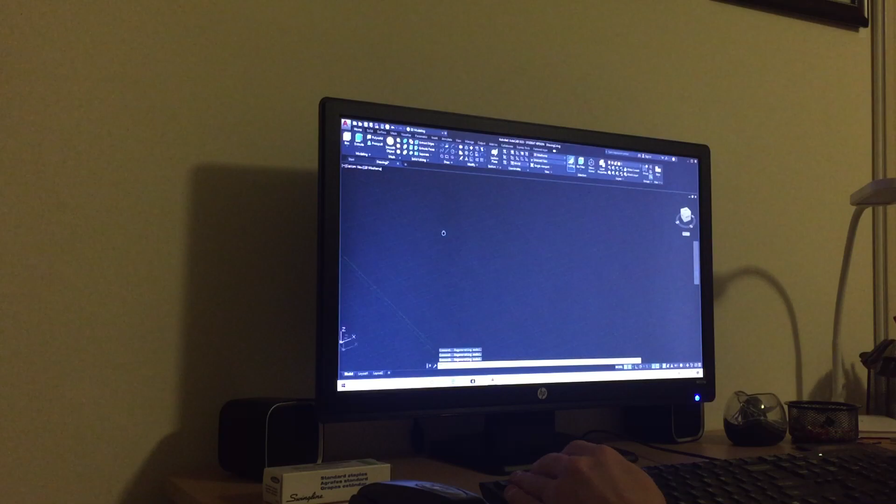First you're going to want to start out with your 3D modeling view, go to this view, and start a 3-point arc. You're going to want object snap on, snap grid on, and ortho mode off.

Bring that around about 10 units, then bring this down to about 0.5 units, and then we can grab a line and trim it because these arcs are sometimes weird.

Open the trim command, select your cutting edge, and then select what you want to be trimmed. After that you can delete this.

Up next you're going to want to make a circle. Doesn't matter where you put it, and we're going to do about 2 units. Now you're not going to want to sweep this yet, but you'll want to do that eventually.

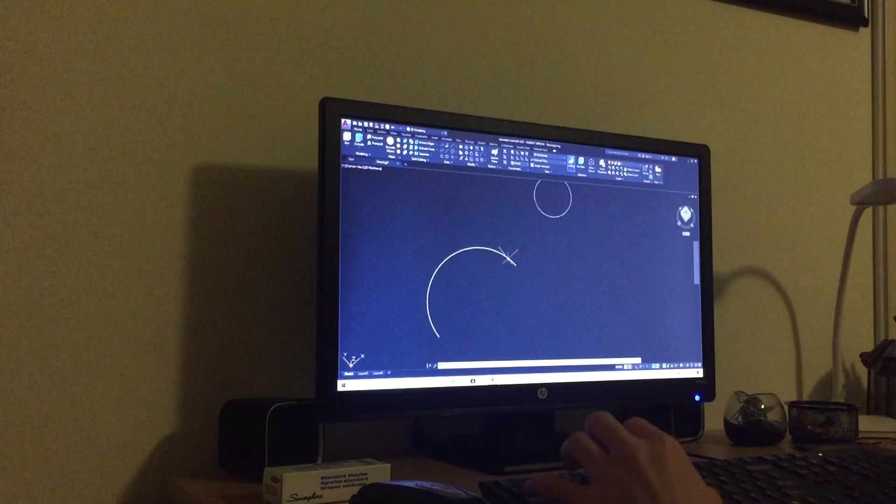So what we're going to do is make a copy of this. You can select the base point anywhere and just move it back, because you'll be moving it again eventually.

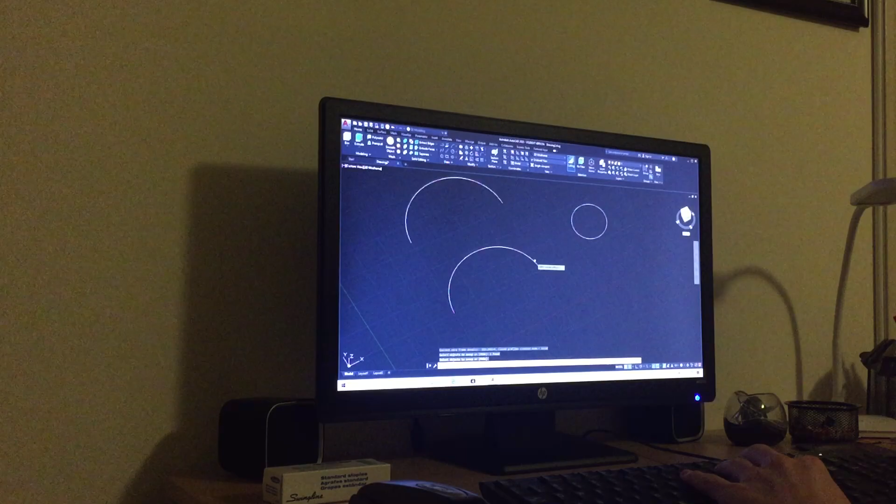What you're going to want to do now is take this and sweep it. Select this, press enter, select this, press enter, then select this. And there you have your main wireframe.

Now you're going to want to move this, select this as your base point, and you can turn snap grid off. You're going to want to select the center point of this circle - make sure it's a center point or it will not work.

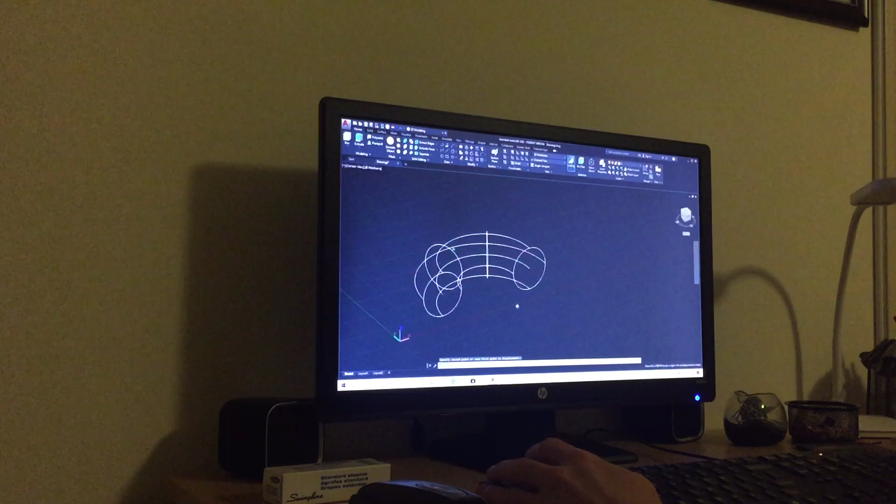Take another circle, put it anywhere, and turn the snap grid back on. Well, you wouldn't have to do that - you could just type it in, but I personally like using snap grid.

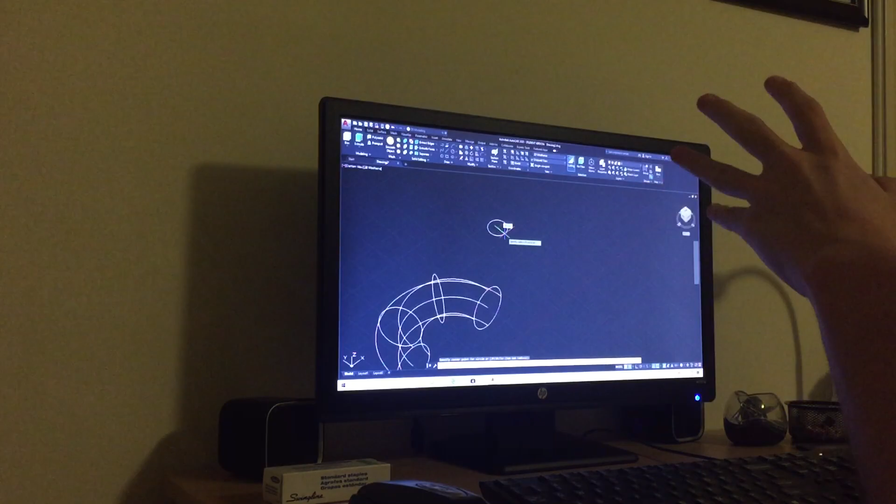Now, what you're going to want to do here is put it at about - it's your choice, depending on how thick you want the pasta - either 1 unit or 1.5 units. So I'm going to do 1.5 units, and I'll sweep it.

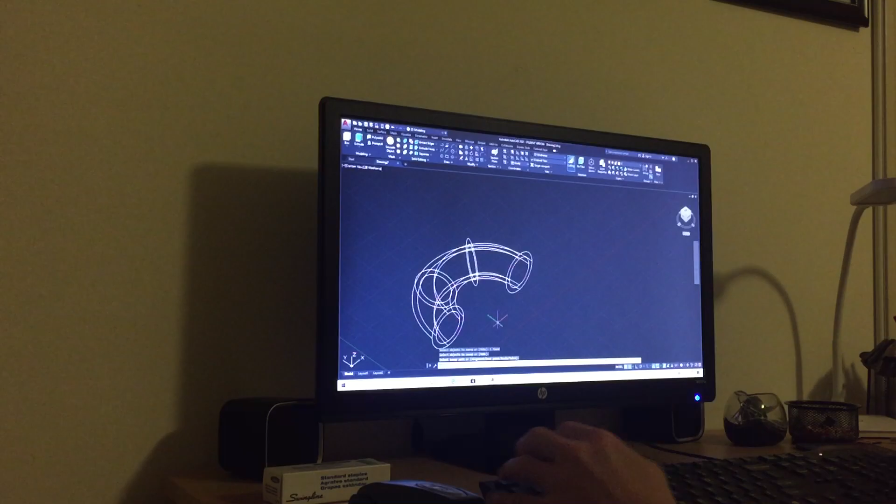Starting here, then press enter, and then you sweep it there. And you see you got relatively thick pasta, and then you're going to want to go into your realistic view.

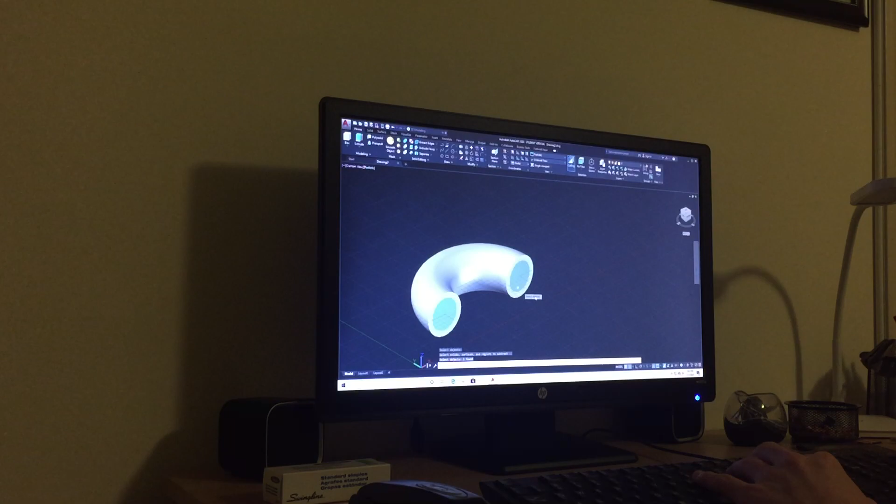Then you're going to do subtract, and you're going to want to select the outside layer, press enter, and select your inside layer. Sometimes it can be tricky because sometimes it does not want to work, and then you do enter. Then you can see you have relatively thin pasta with 1.5, which isn't bad.

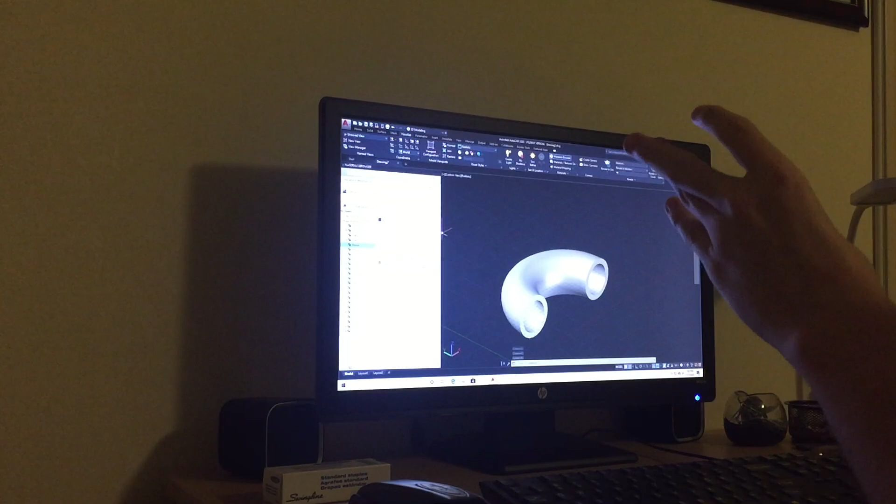Then, since we're in the realistic view, we can go into our visualize tab and go to materials browser, and you can select whatever one you want, if you want sauce or not, but this one I'm just going to do a raw noodle, so I will choose urethane 1.

Oh, pardon me, no, I need to use wax black on red wood. No, that's not right either. This one - wax red on light wood.

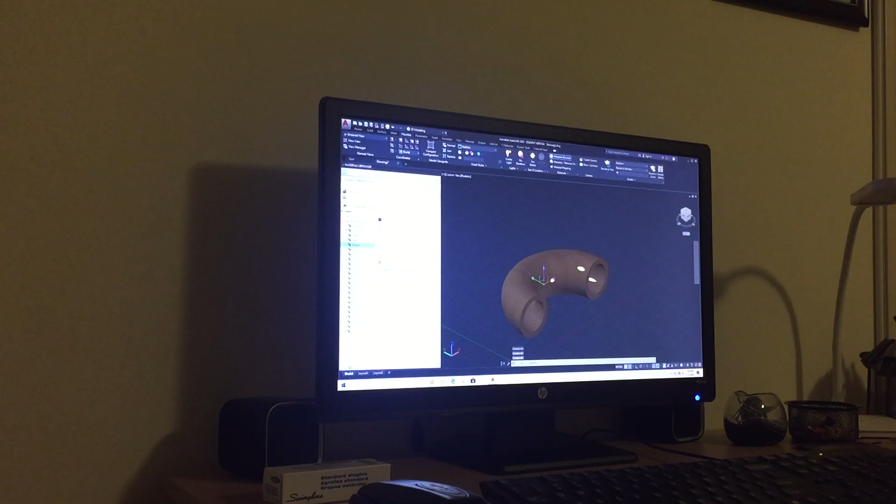And that looks like that's the closest you'll get to chili con carne. But if you'd like to add sauce or anything, then that's up to you. I personally love the way this looks, and it would be ready to go into the bowl with the rest of the sauce.